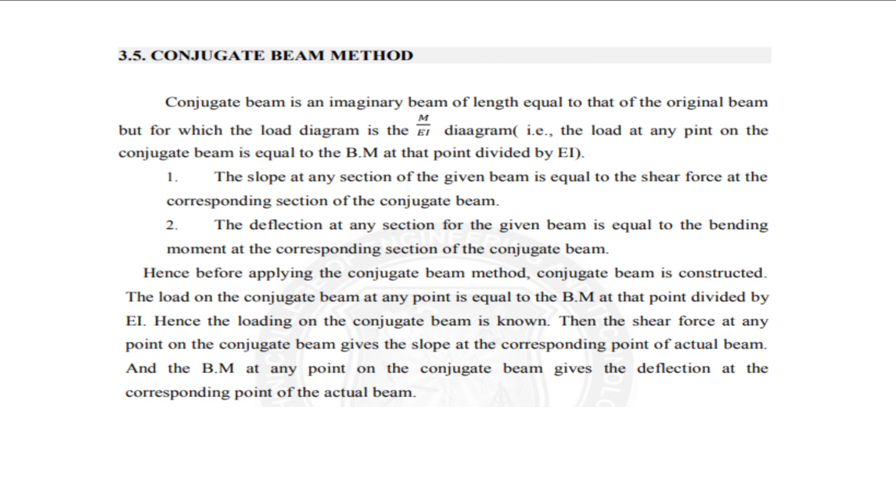Here, slope and deflection of a simply supported beam with a point load at center. So for this, there is a formula RA is equal to RB is equal to total load divided by 2. Bending moment at center C is equal to RA into L by 2 is equal to W by 2 into L by 2 is equal to WL by 4.

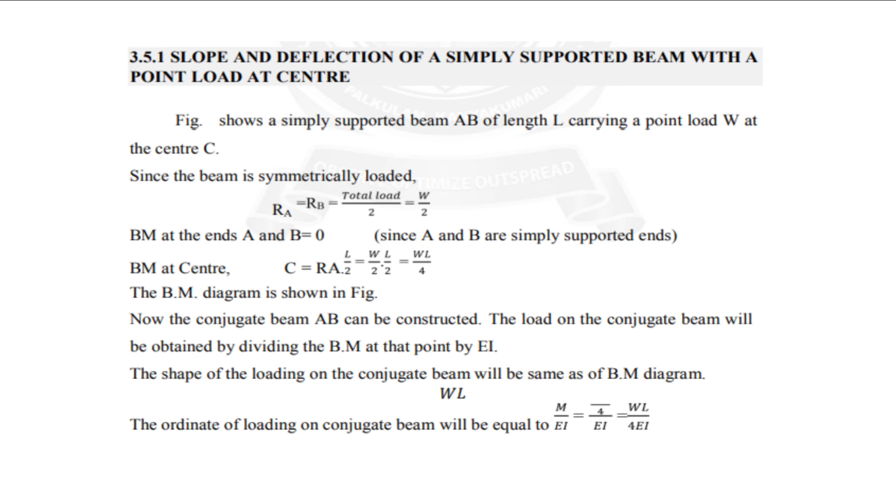The shape of loading on the conjugate beam will be same as the bending moment diagram. The ordinate of loading on conjugate beam will be equal to M divided by EI, that is WL divided by 4EI. So this is the simply supported beam. We are having the bending moment and shear force diagrams. RA and RB, reaction at A and reaction at B, and total load on the conjugate beam is equal to WL square by 8EI.

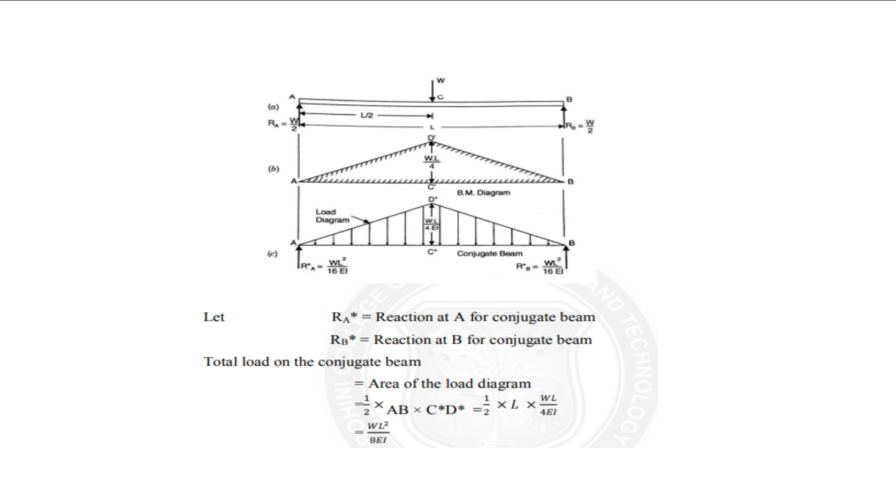And next, slope and deflection for a simply supported beam with a uniformly distributed load. So, a simply supported beam AB of length L carries a UDL. Since the beam is symmetrically loaded, RA is equal to RB is equal to total load by 2. We are getting the bending moment at center is WL square by 8.

And here the shape of the loading on the conjugate beam will be same as the bending moment diagram, that is WL square by 8. So this is the diagram. You are having the reaction at each support for the conjugate beam, that is WL cube divided by 24EI.

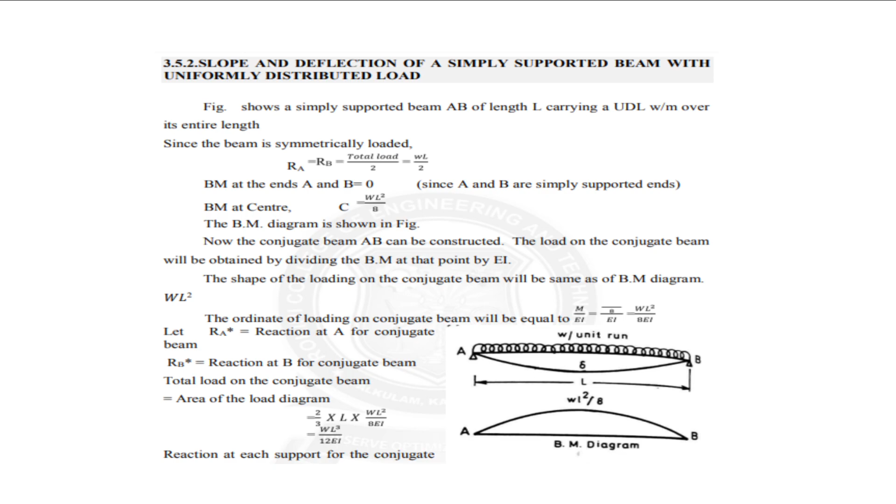So you have to see the problem. A beam ABCD is simply supported at its ends A and D over a span of 30 m. It is made up of 3 portions AB, BC and CD, each 10 meters in length. The moments of inertia of the section of these portions are I, 3I, 2I respectively, where I is equal to 2 x 10 power 10 mm^4.

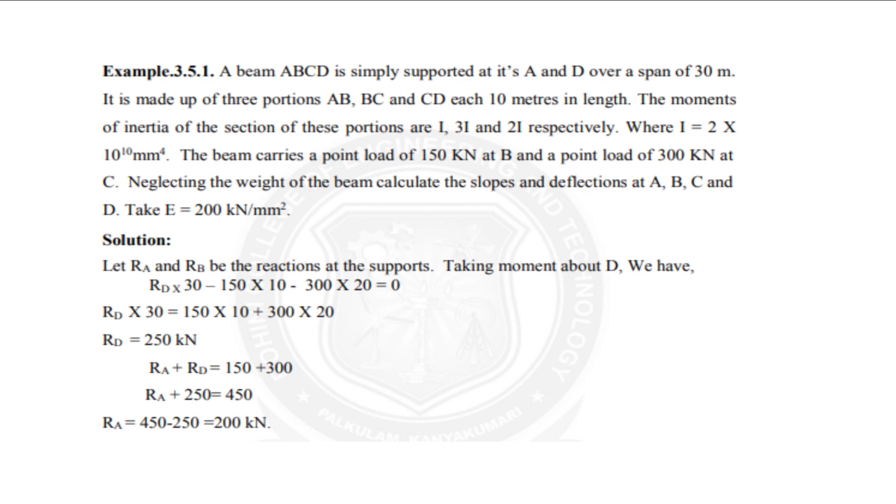The beam carries a point load of 150 kN at B and a point load of 300 kN at C. Neglecting the weight of the beam, calculate the slope and deflections at A, B, C and D. Take E is equal to 200 kN per mm square. So in the solution, first you want to find the reactions RA, RD, that is RD is equal to 250 kN and RA is equal to 200 kN.

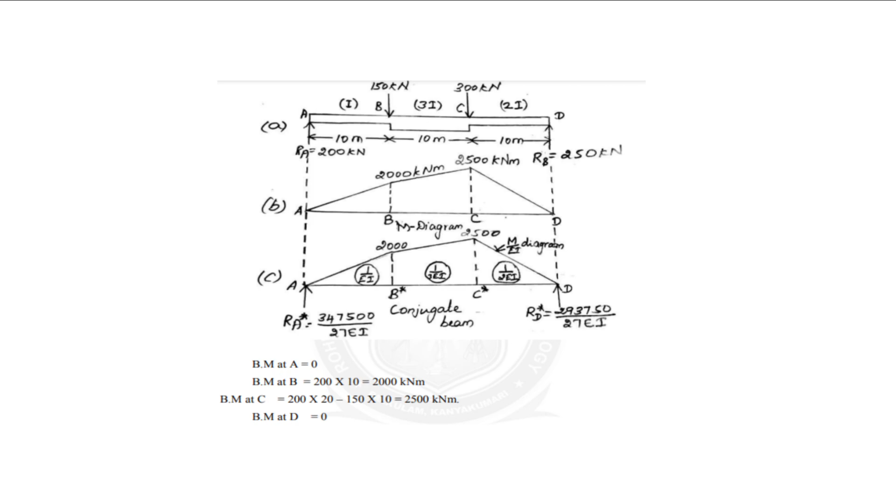So this is the diagram. You are having the bending moment diagram by using the conjugate beam. So here the bending moment calculations will be there. Bending moment at A and D is equal to 0, B is equal to 2000 kN meter, C is equal to 2500 kN meter. The slope at A of the given beam, getting the value 0.003218 radians, slope at B 0.0007176, slope at C 0.001157 radian, slope at D 0.00272 radian.

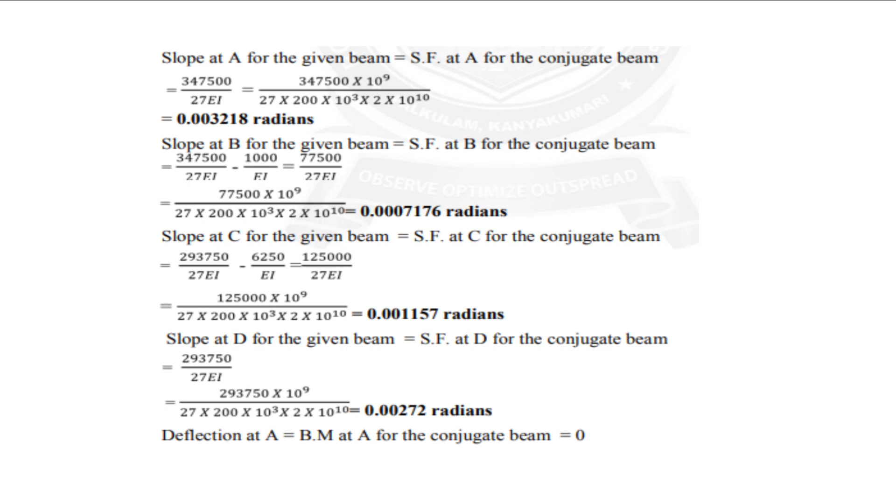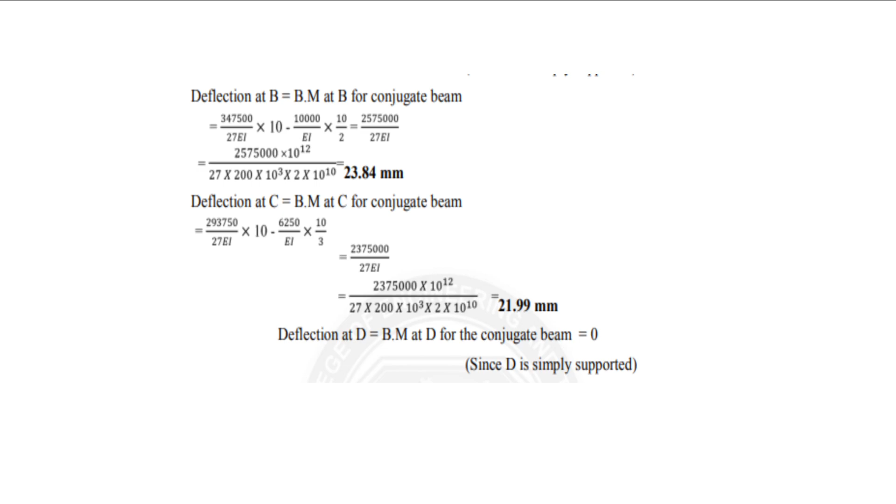And deflection at A, the bending moment for the conjugate beam is equal to 0. Deflection at B, from the bending moment for the conjugate beam we are getting the value 23.84 mm. Deflection at C, we are getting the value 21.99 mm. Deflection at D is equal to 0.